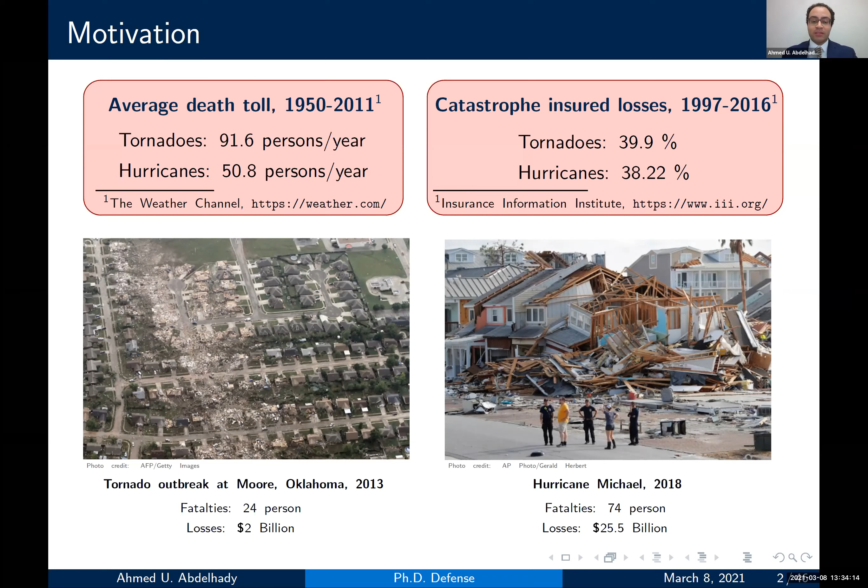The exposure component, which is where does this storm hit? For example, when hurricanes are moving over the Atlantic Ocean, no one gets hurt, so no disaster could happen. So there should be a living community exposed to the hurricane or tornado for a disaster to happen.

And finally, the resilience component, which is how resilient the exposed community is to this windstorm. If a tornado hits a very resilient community, no damage will occur, which means no disaster will happen. So as we can see, the level of resilience of the exposed community is an important factor as it will determine if a disaster will occur or not.

This brings us to an important question: are we confident about how resilient the exposed communities are? Is Miami ready for the next hurricane? Is Joplin prepared to take another tornado? In other words, how can we measure their resilience level to be more confident about their future?

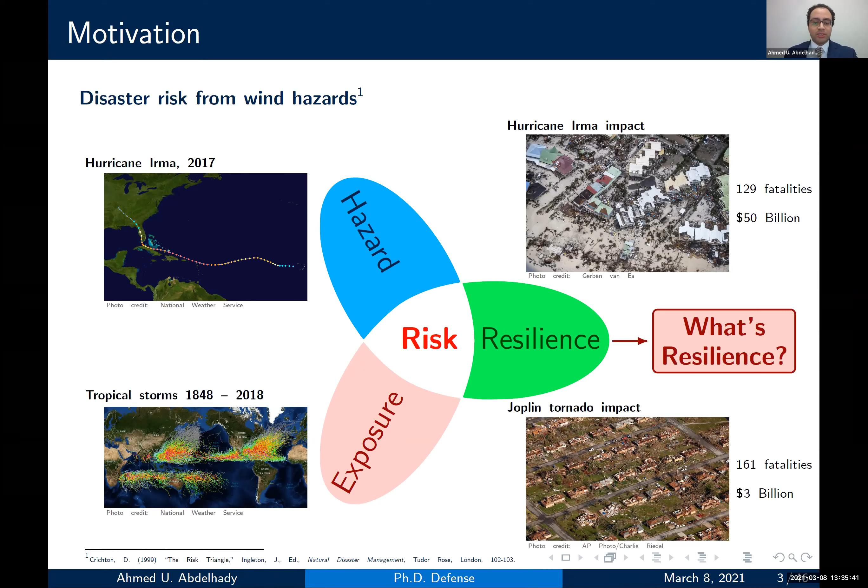To answer this question, we first need to define resilience, which is, according to the National Academy of Science, community resilience is the ability to prepare and plan for, absorb, recover from, and more successfully adapt to actual or potential adverse events.

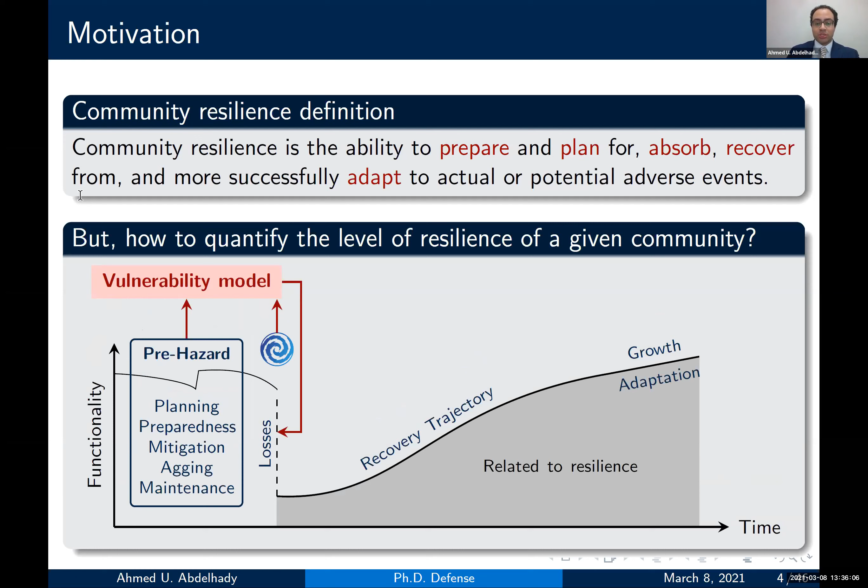To measure or quantify community resilience, we need a vulnerability model that uses the community's pre-hazard conditions and potential hazards as input to calculate the amount of immediate damage and losses, which will be used by a recovery model to estimate the community's recovery trajectory, and then the community resilience. So there are two required models to estimate community resilience: the vulnerability model and the recovery model.

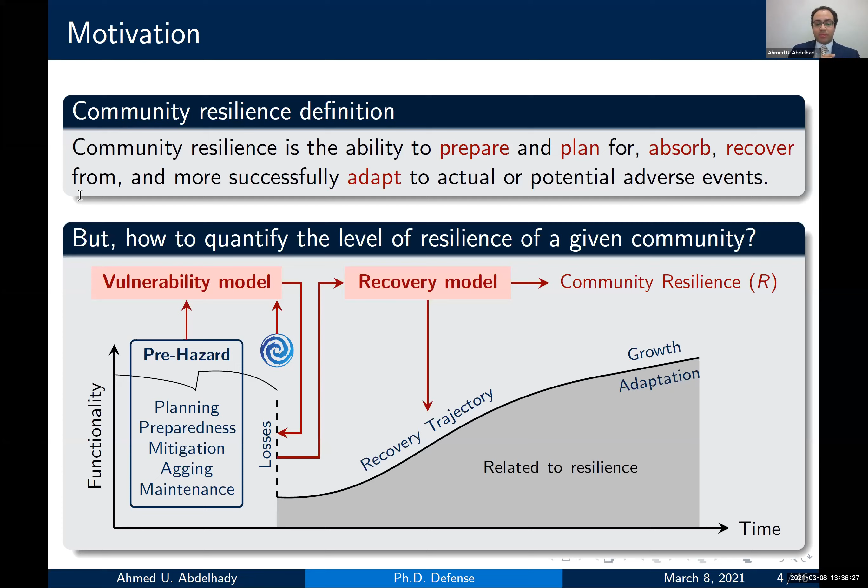This brings us to the outline of today's presentation. Today I will talk about the vulnerability and recovery modeling of residential communities subject to hurricane winds. Then I will present a framework to model the impact of hurricane rainfall. And finally, I will cover modeling of wind-borne debris in tornadoes, as wind-borne debris is one of the major sources of damage in tornadoes. So let's get started with the vulnerability of residential communities subject to hurricane winds.

What is the physics of the problem? We have a subdivision of residential buildings that is subject to a hurricane. Once the wind pressure on the building envelope exceeds its resistance, the building envelope components get damaged and potentially become airborne. The wind-borne components could potentially hit buildings on the downwind side and cause more damage. This breach in the building envelope will induce internal pressurization that could lead to more damage and more wind-borne debris.

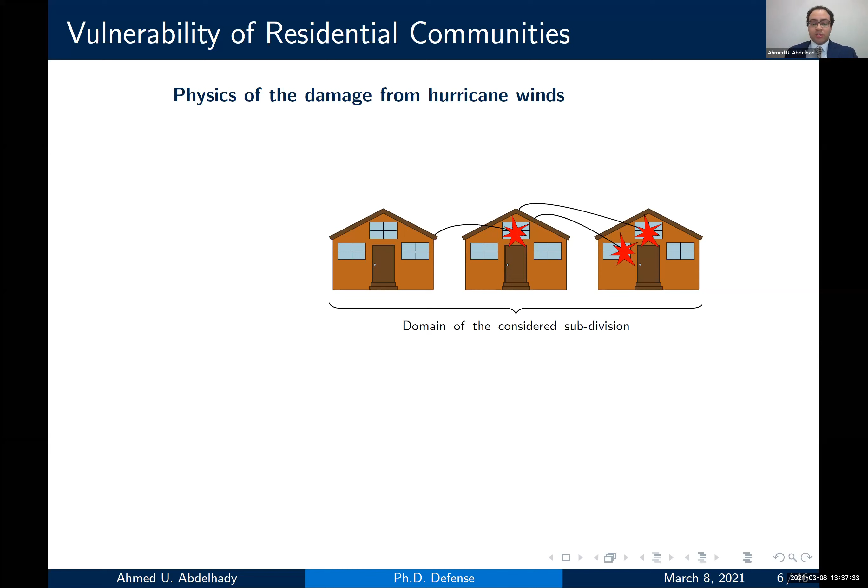So we have two damage mechanisms here: excessive wind pressure and the impact of wind-borne debris. The two mechanisms are progressive — the damage keeps progressing gradually as the hurricane approaches the community. They are interdependent and cascading: once the first damage occurs, more damage will occur, as in a domino effect.

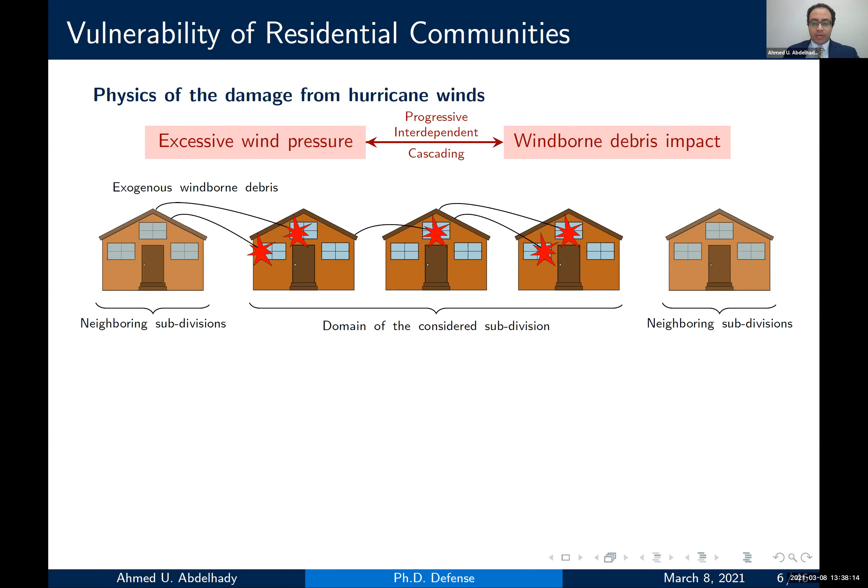Due to this cascading and interdependent nature of the damage, neighboring subdivisions can also have a destructive impact on our considered subdivision — what we will call here the effect of exogenous wind-borne debris. By taking a look at the literature, we find that the effect of exogenous wind-borne debris has not been studied yet.

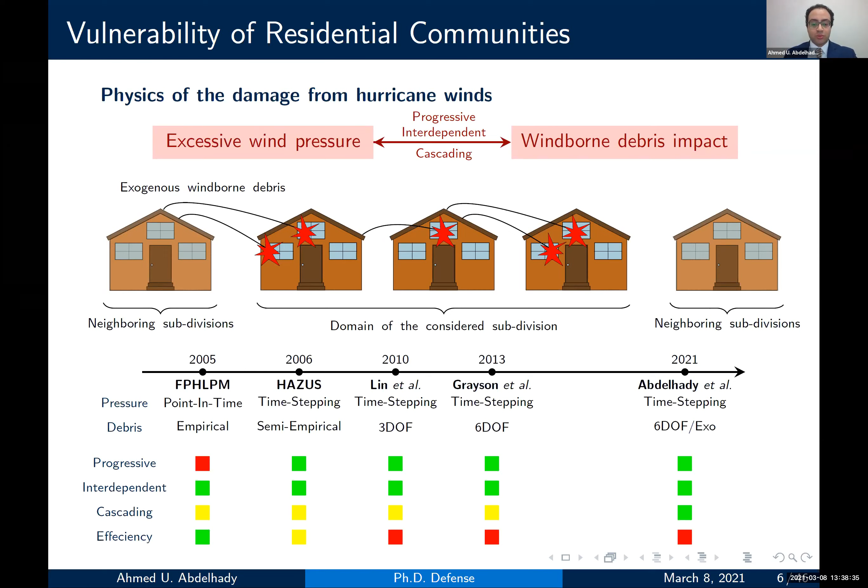So what I'll be presenting today is a time-stepping approach that models the full track of the hurricane while modeling the debris flight using a 6 degree of freedom trajectory model, and also accounting for the exogenous wind-borne debris. I'll start off with the exogenous wind-borne debris.

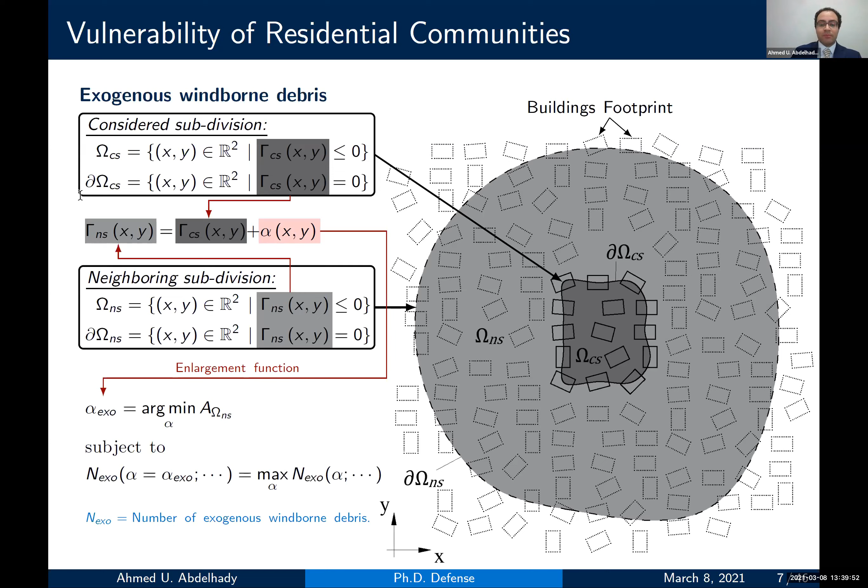The way I will handle this problem is by reformulating it for a single building case, and this will be helpful for two main reasons. The first is the boundary of the neighboring buildings can be assumed to be circular in the single building case, and circles are more manageable to deal with. The second is the single building case can be easily generalized to a neighborhood with any arbitrary boundary by simply taking the union of all buildings' required area.

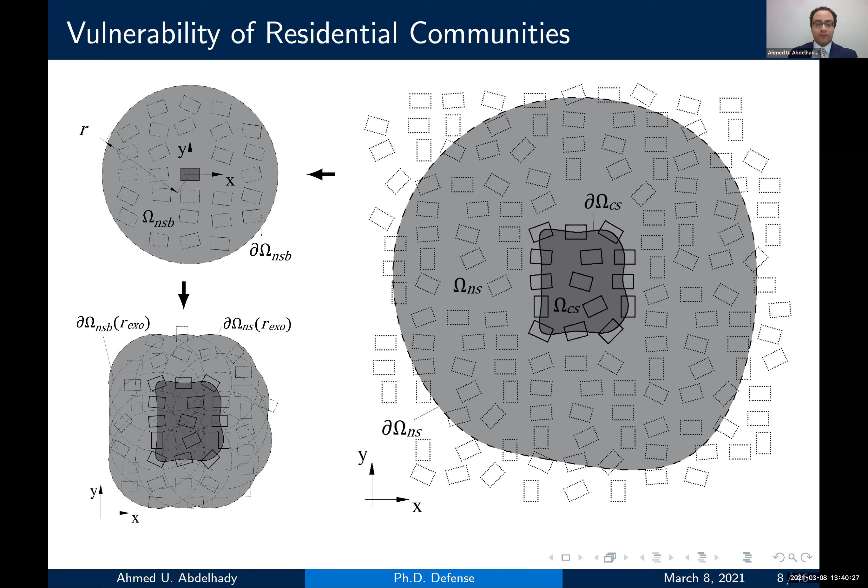This can be formalized as follows. We first need to find the omega for a single building case, then generalize the solution by taking the union of all omegas. By looking at the new optimization problem, we find that we need to estimate n exo, which is the number of exogenous wind-borne debris hitting the building.

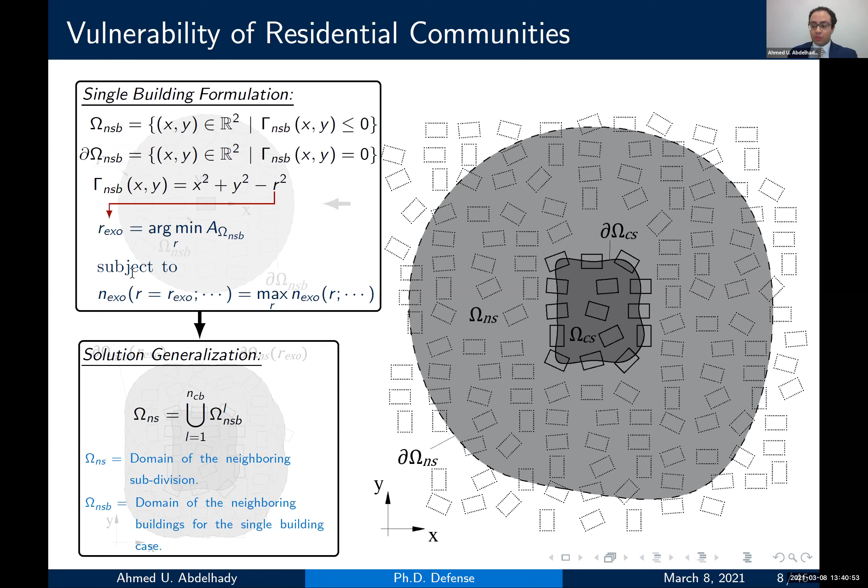The question here will be, how will we estimate this number? To answer this, we need to know the source of exogenous wind-borne debris, which is the damaged components of the neighboring buildings, and the driving force of the debris flight, which is the hurricane wind velocity. So we have neighborhood-related factors as well as hurricane-related factors, and all of them are associated with uncertainties — uncertainties in the building strength, uncertainties in the hurricane track, heading, pressure drop, wind speed, etc.

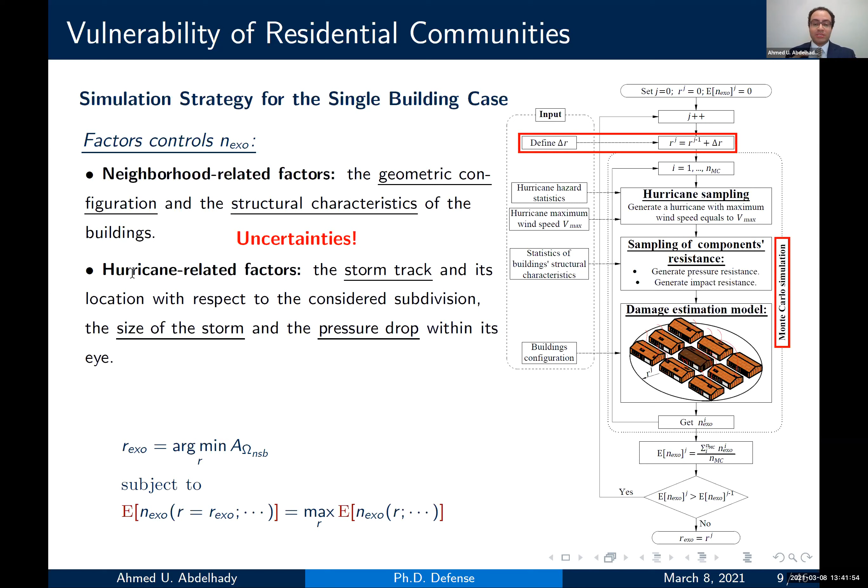These uncertainties will be handled using the Monte Carlo simulation method, and the problem statement will change to maximize the expected n exo. So in summary, the simulation strategy will increase the radius incrementally using a predefined delta R, then measure the number of exogenous wind-borne debris for each size step. Once the expected n exo maxes out, the r exo will equal this size step.

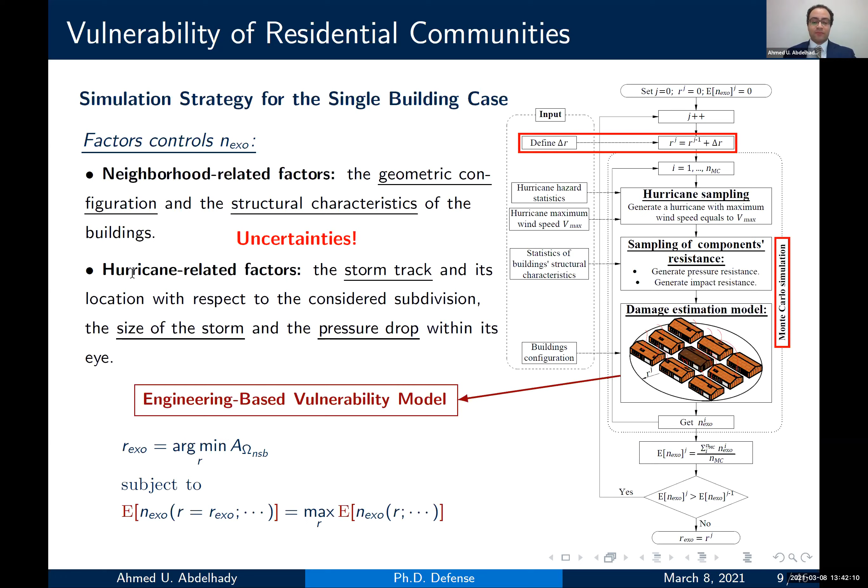And the damage estimation model used in this simulation is an engineering-based vulnerability model, which estimates building damage due to excessive dynamic wind pressure and debris impact.

Okay, let's take a quick look at some details on how exactly I calculate the wind pressure and debris loading. The debris linear and angular velocities used to estimate the debris impact energy are calculated using a three-dimensional 6 degree of freedom debris trajectory model.

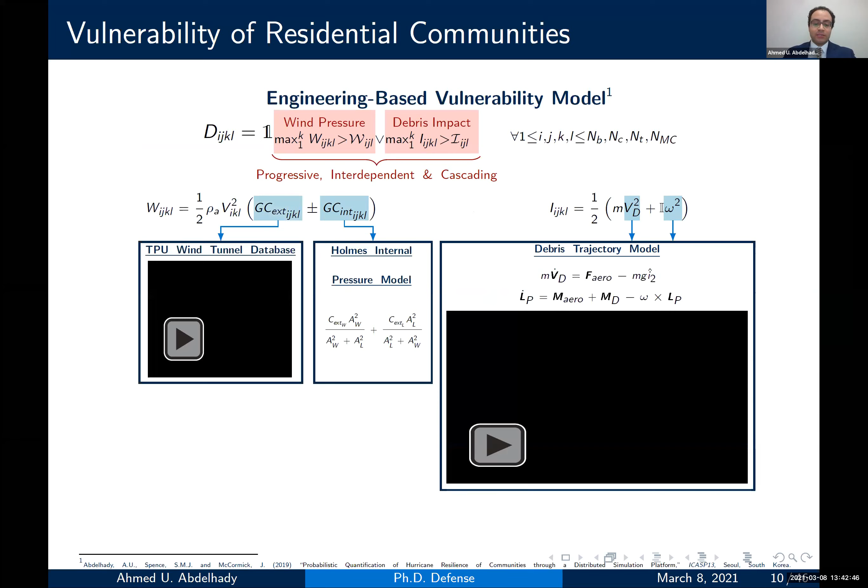As we can see here, wind-borne debris objects are in red and the houses are in blue. The internal pressure coefficients are estimated using Holmes' internal pressure model, and the external pressure coefficients are obtained from the wind tunnel database provided by Tokyo Polytechnic University.

Both damage mechanisms are a function of the hurricane wind field, which is estimated by adding the environmental scale component and the storm scale component vectorially. The environmental scale component is estimated based on the hurricane eye translational velocity, and the storm scale component is estimated by solving the momentum equation of the slab boundary layer.

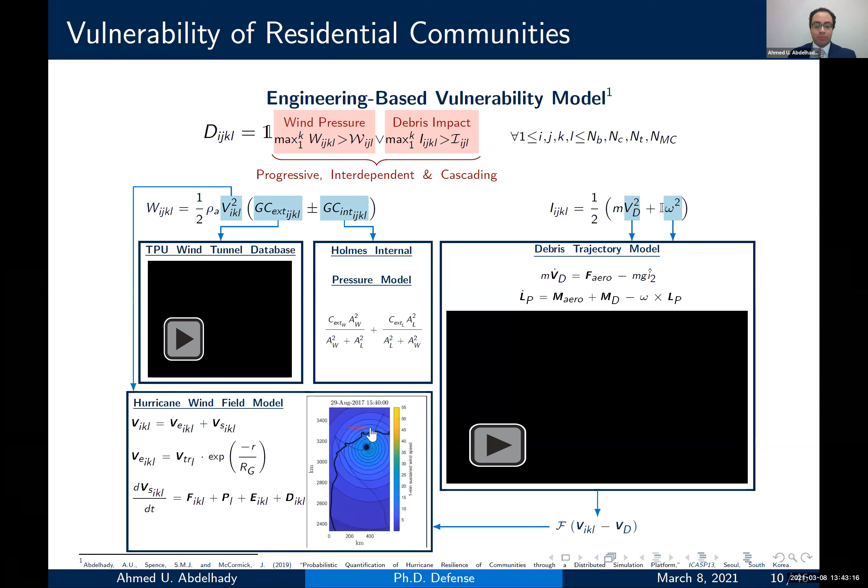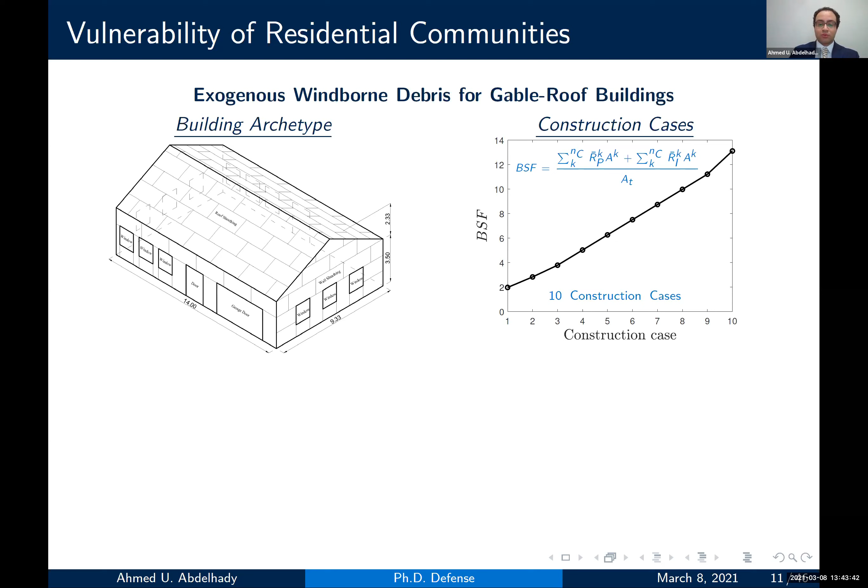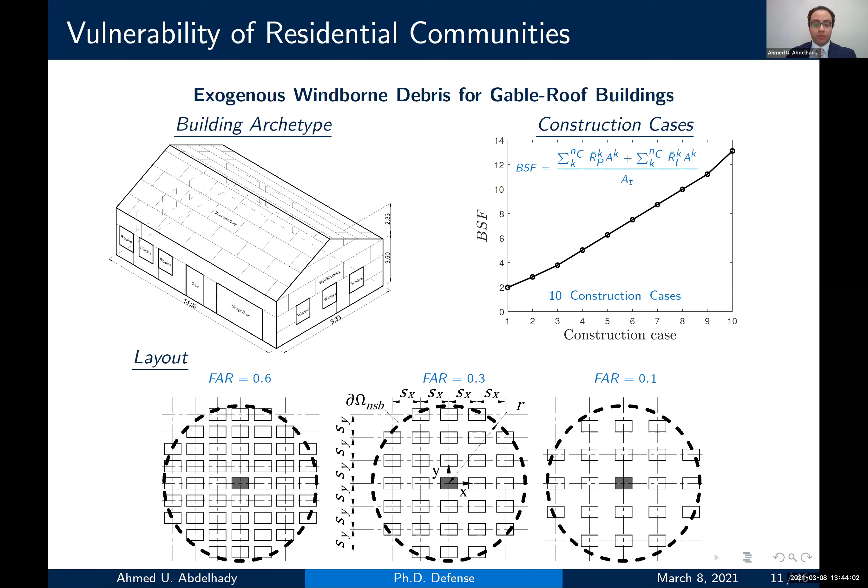In this study, we explored the effect of Vmax, which is the hurricane maximum wind speed, and the floor area ratio, and the building strength factor on the required r_exo. We need to note that all the RXO results reported in this study are normalized using Rmax, which is the maximum flight distance for the debris.

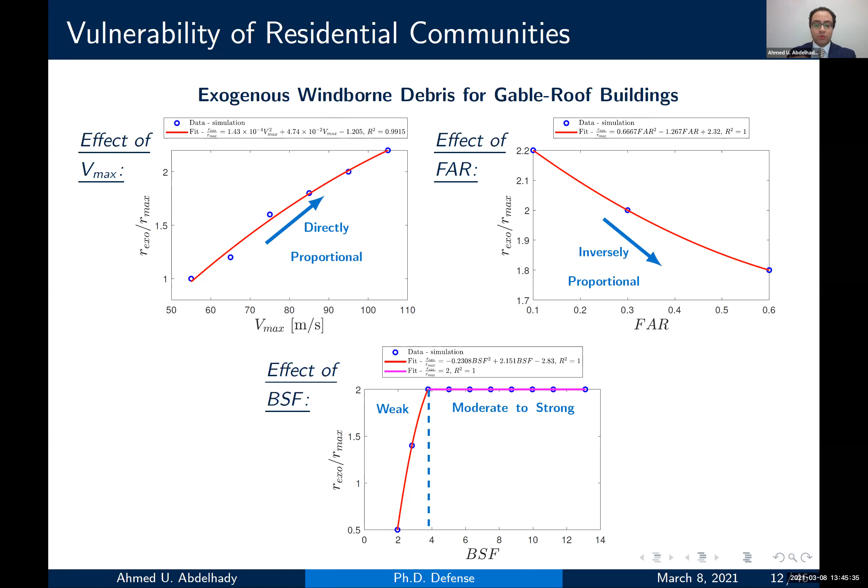The last figure shows that in general, building strength does not influence the required RXO, except for very weak construction cases, which require significantly smaller RXO compared to moderate and strong construction cases. The main reason is that weak construction cases tend to get damaged at very low wind speeds, and these low wind speeds are not sufficient to carry the dislodged components far enough to impact the considered building. As a result, the required RXO are lower here.

We concluded this study with a regression analysis to summarize all the results into a mathematical expression that can be used directly in the future without the need to rerun the simulations. Three main regions are used in this analysis.

We can observe that a big portion of the simulated domain shows a value of RXO that is actually bigger than Rmax itself, which emphasizes more on the cascading and interdependency nature of the damage from wind-borne debris.

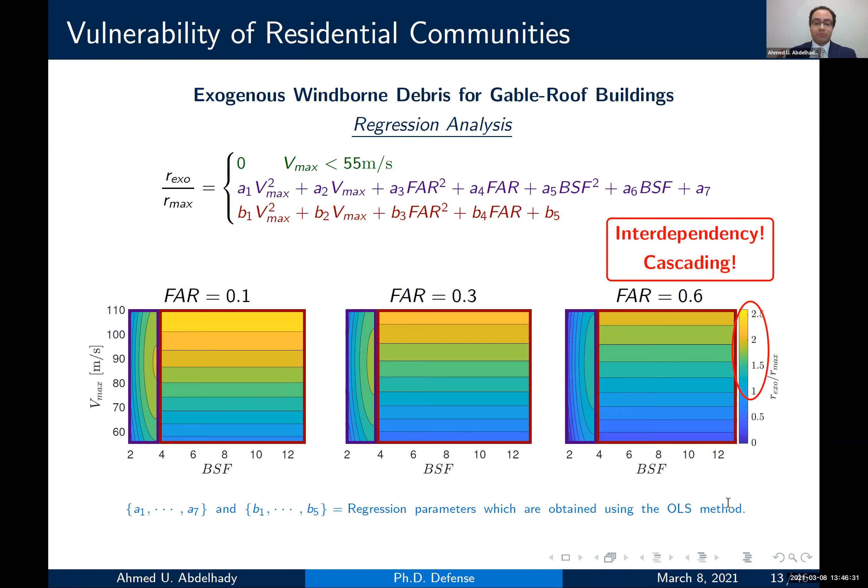So we concluded the first study, and we will move forward to the second one, which is risk and fragility assessment of residential wooden buildings under hurricane winds.

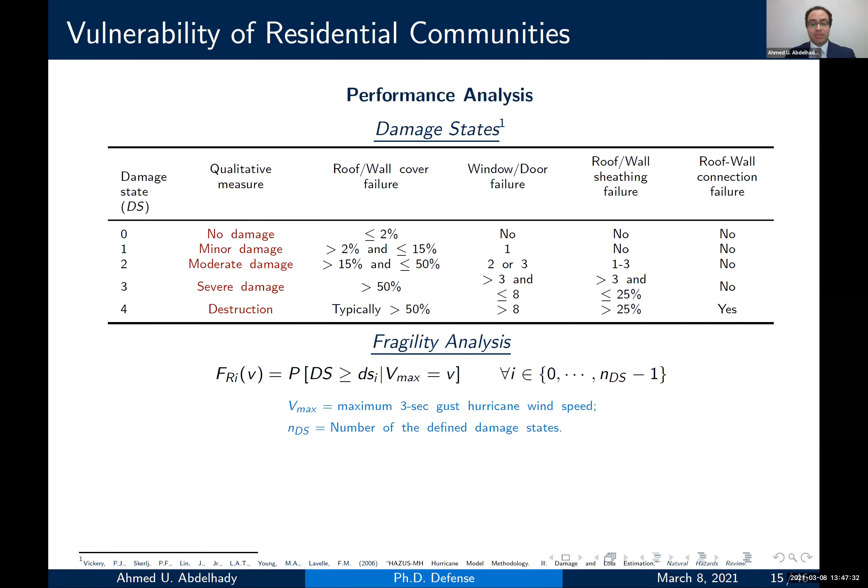To quantify the building performance probabilistically based on these damage states, fragility functions are required, which read as the probability of the building damage state exceeding a certain damage state given a specific hazard intensity, which is the maximum 3-second gust wind speed experienced by the building during the hurricane passage.

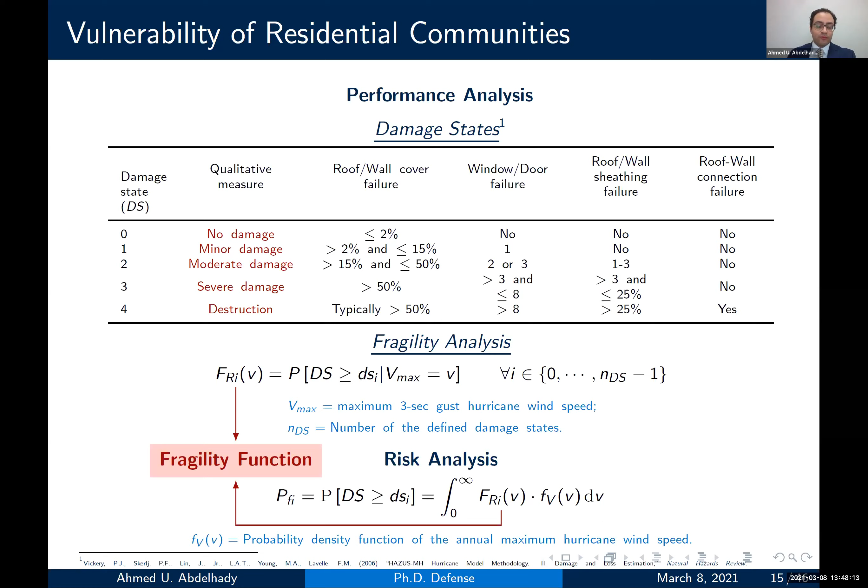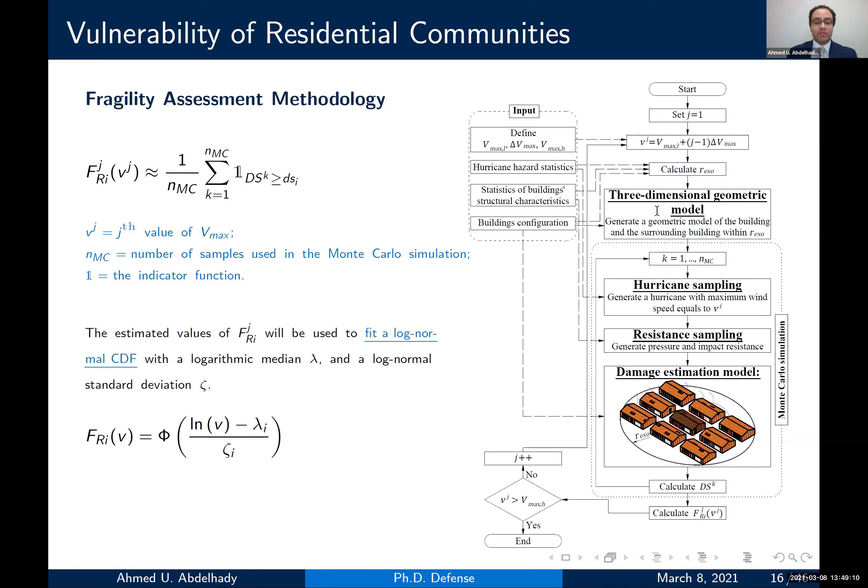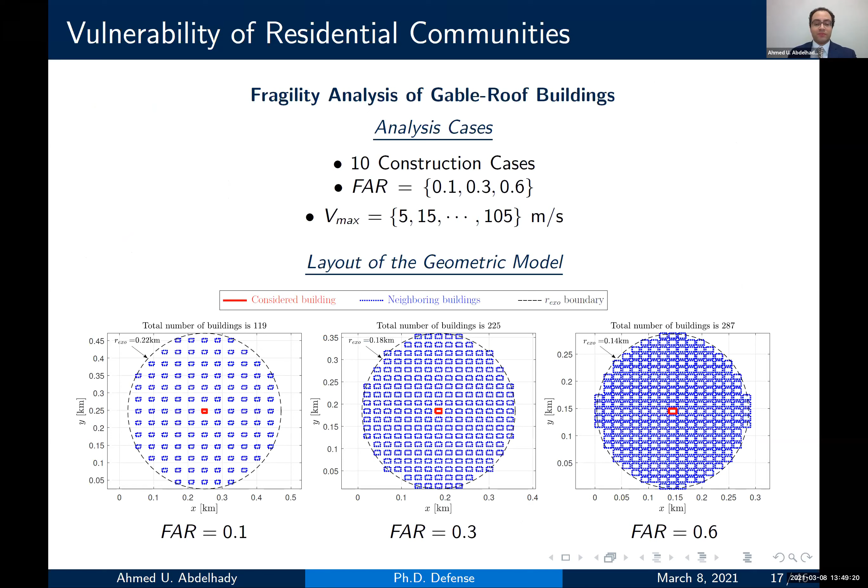Here, we applied this methodology to a gable roof archetype. Analysis cases are 10 construction cases, 3 floor area ratios, and 11 Vmax.

For the results of this study, I'll be more focused on showing the significance of including wind-borne debris damage on the estimated fragilities, as this is the main contribution here. Fragilities due to wind pressure damage have been around for a while, so I'll focus more on the effect of wind-borne debris.

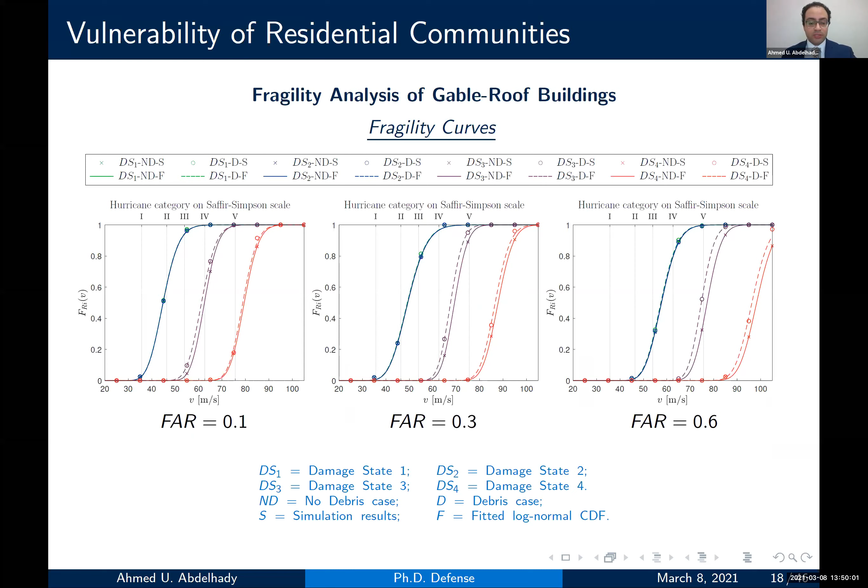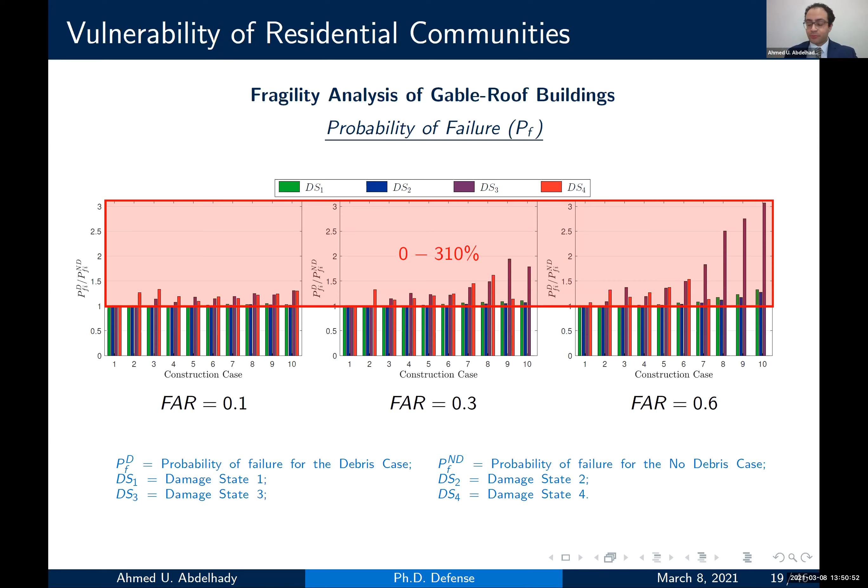Last one is we can clearly observe that the damage from wind-borne debris increases as the floor area ratio increases, which we also observed in the fragility curves. And this will conclude this study.

Now, we covered the vulnerability and the damage estimation part, and we will move on to the recovery and resilience part.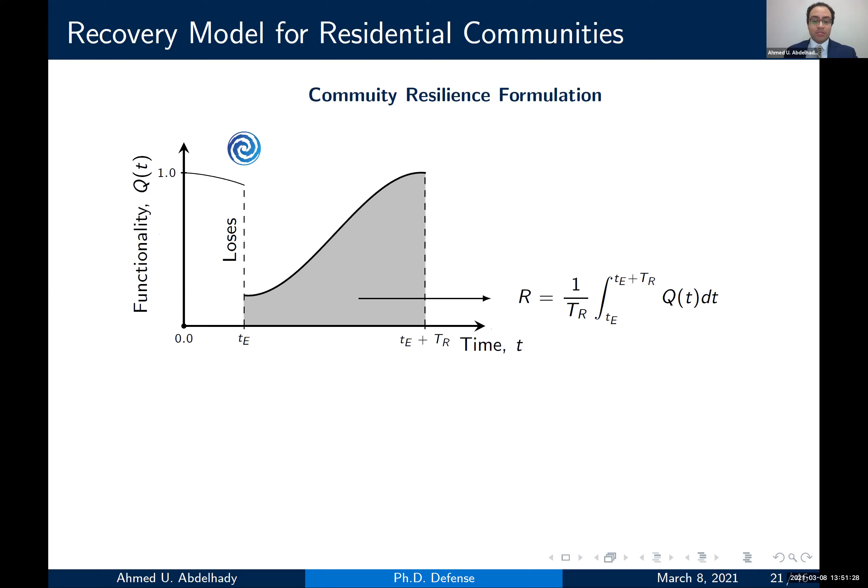Estimating the community recovery function hinges on the hazard intensity, the community vulnerability, as well as the recovery process, all of which are uncertain. And to account for these uncertainties, we need to quantify the community resilience probabilistically by estimating the cumulative distribution function of R.

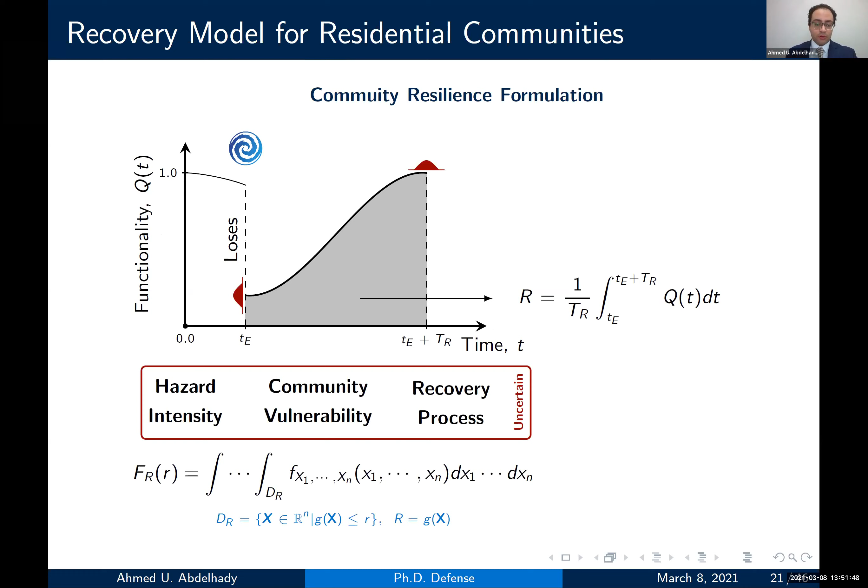We will find that deriving an analytical solution for this function is intractable, so a stochastic simulation approach is proposed here in this work, which is the basis of the presented framework.

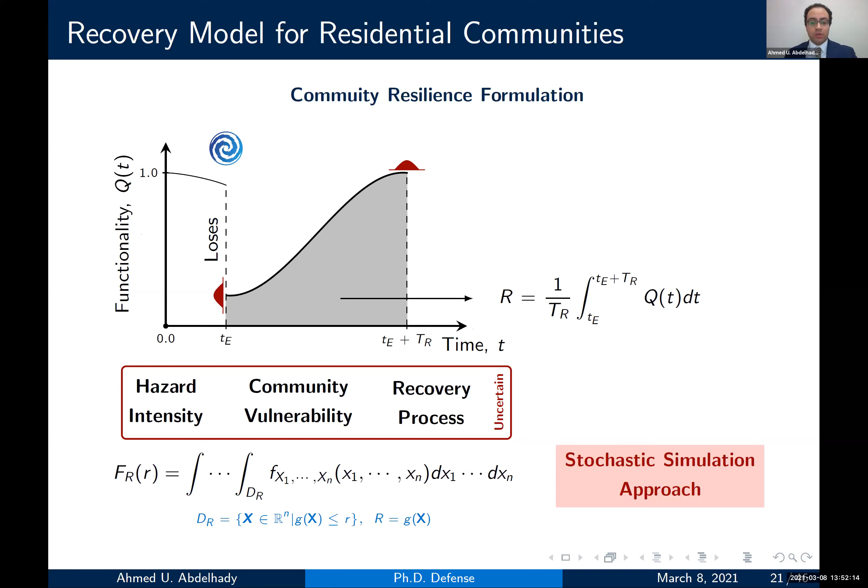So to wrap up, our goal is to quantify the community resilience measure R probabilistically by estimating its cumulative distribution function using a stochastic simulation approach. The stochastic simulation approach uses the Monte Carlo simulation algorithm for the estimation of the CDF of R.

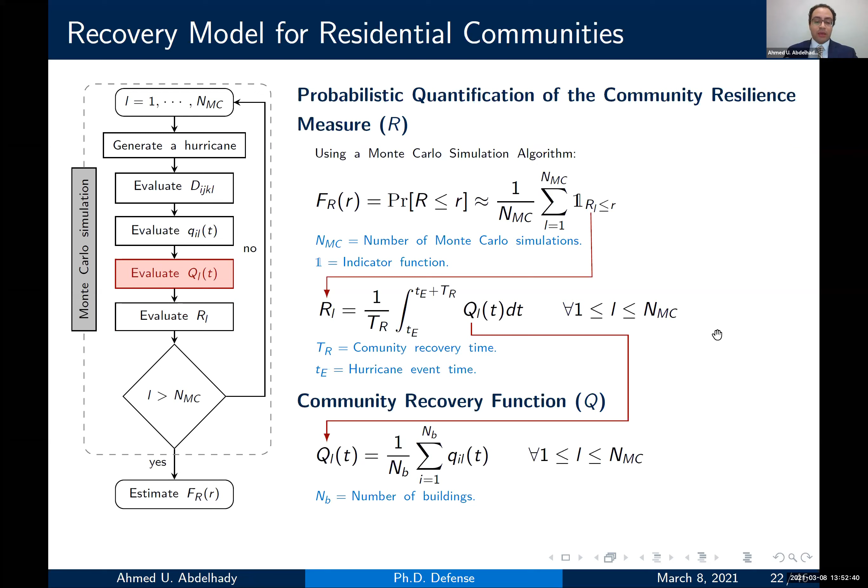We can find the flowchart of the proposed framework on the left side of the slide here. And for each realization, R is estimated using the community resilience measure integral. And the community recovery Q is estimated by aggregating building recovery functions.

The building recovery function is estimated using a new building recovery model, which is based on three functionality states: not safe in red, safe with some services off in yellow, and safe with full services in green. By services here, I mean things like electricity, water, internet, gas, etc.

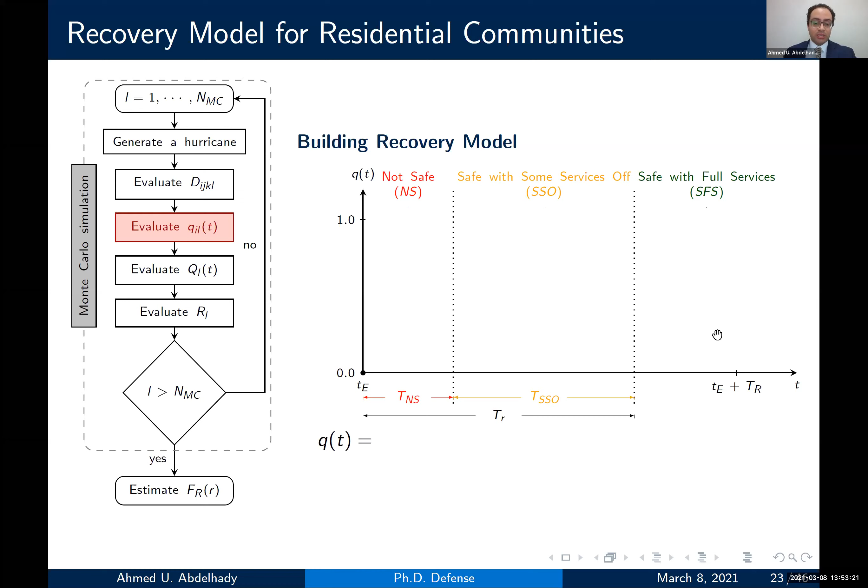Okay, we know that the work progress for the recovery activities typically advances continuously over time, while the functionality state changes only at the completion of a group of activities. For this reason, the level of functionality associated with the functionality states is modeled using the Heaviside step function, and it is either 0 or 1.

0 means residents evacuate or didn't return back to the building after the hurricane event, while 1 means they returned back or didn't evacuate in the first place. In particular, the level of functionality, as we can see here in the graph, of the NS state is 0 and the SFS state is 1.

And for the SSO state, the one in yellow here, it is either 1 or 0, since the building is safe to occupy, but there are some services off. In this functionality state, the residents may choose to return back to their residence or not.

A decision like that hinges on the level of damage of the building itself and its surrounding buildings and the socioeconomic status of the residents. In this building recovery model, this is considered using the probability of functionality loss given the SSO functionality state. Okay, so this is the idea of the building recovery model.

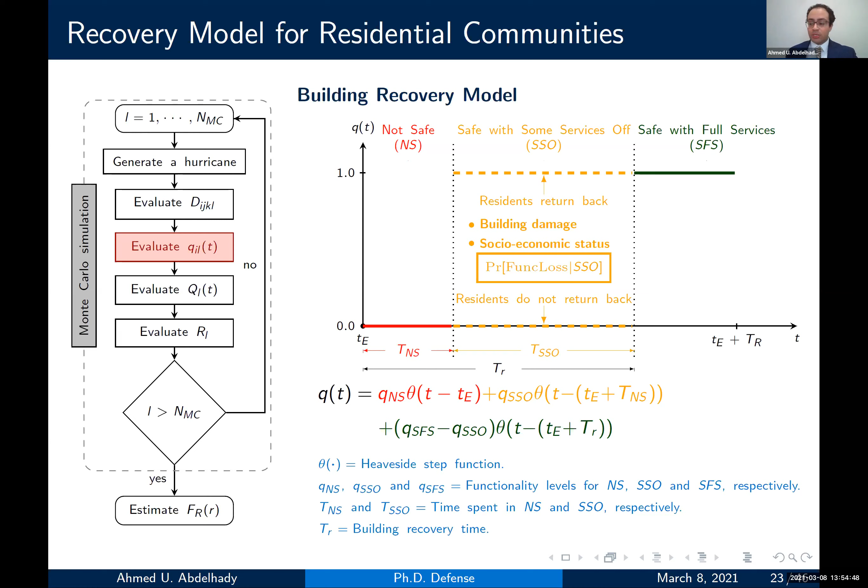Now the question is, how will this conceptual idea be able to model the recovery of each building in the community? The answer is using newly defined resilience limit states that are introduced here in the building recovery model, to translate the damage sustained by each building to a corresponding recovery function.

In particular, 5 resilience limit states are defined here, named as minimal damage, minor occupiable damage, moderate unoccupiable damage, severe irreparable damage, and complete collapse. Each one of these resilience limit states has a unique combination of the following recovery activities: inspection, evaluation and planning, repair activities, and demolition and replacement.

Okay, so to conclude, there is building damage and the building recovery functions that consist of 3 functionality states. What exactly is the recovery path of the building? This will be specified by the resilience limit state this building is in.

Keeping in mind that these resilience limit states do not just deal with each building as a separate entity from the surrounding community, they actually factor the condition of the building surroundings in the recovery path calculation, and this is described in more detail in this paper. Finally, the damage sustained by each building is estimated using the engineering-based vulnerability models that we mentioned earlier.

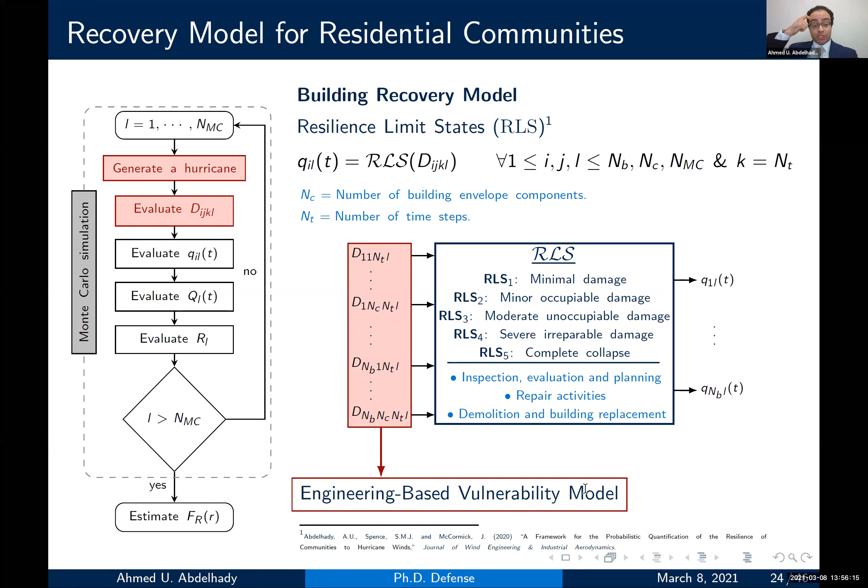Now let's go to the application part. This framework is applied to a residential neighborhood in Miami, Florida, to quantify its resilience to hurricanes probabilistically.

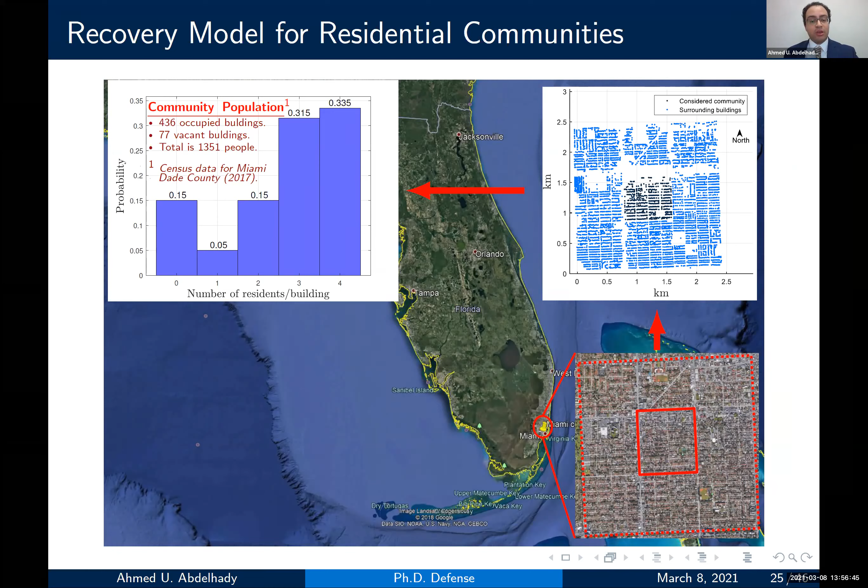The neighborhood consists of 513 buildings. Surrounding buildings are also modeled to account for the exogenous windborne debris. The community population is modeled using available census data about Miami-Dade County. In particular, the number of residents per building follows this probability mass function.

Hurricane generation is controlled by the single-site probabilistic hurricane hazard model, which subjects the neighborhood to 15,000 hurricanes with a category that follows this distribution.

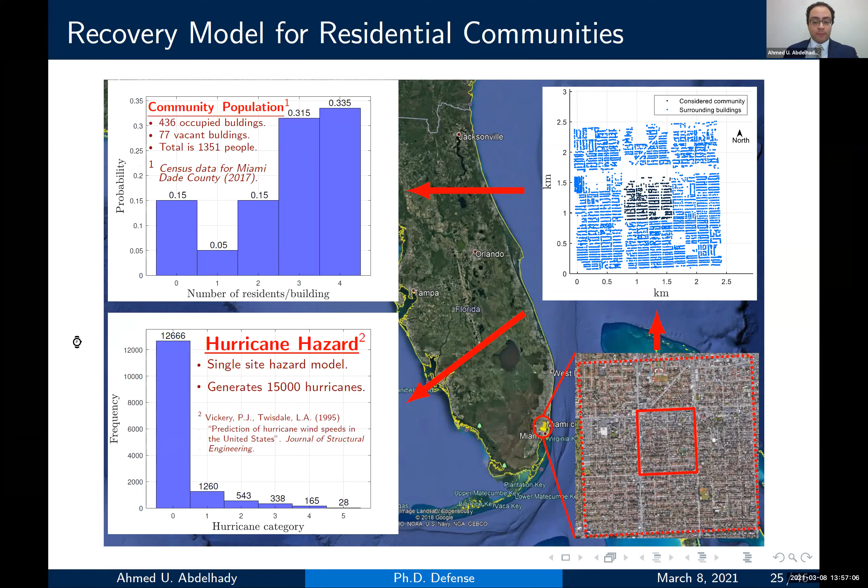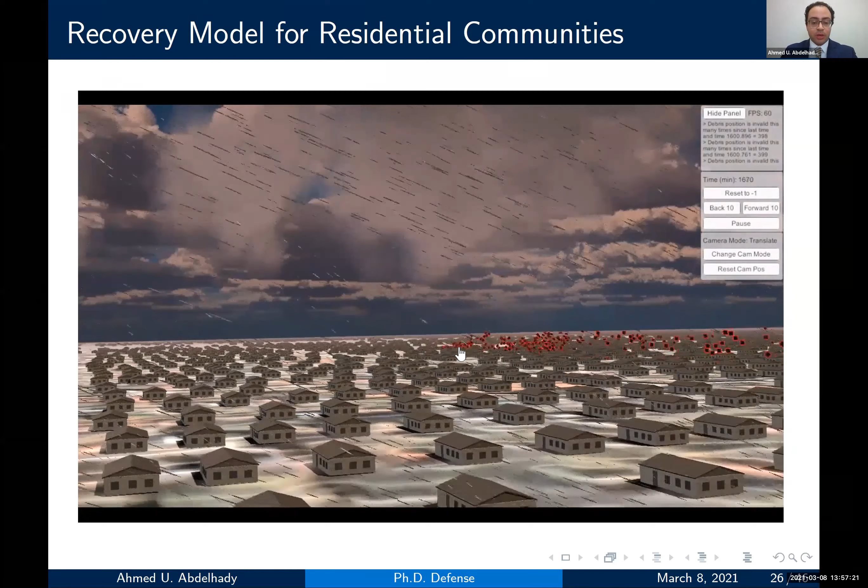In this video, we will see some part of the simulations. A single family, gable roof archetype is used to model the buildings. We can see the windborne debris here highlighted in red, flying in the hurricane's wind field, impacting other buildings and causing more damage.

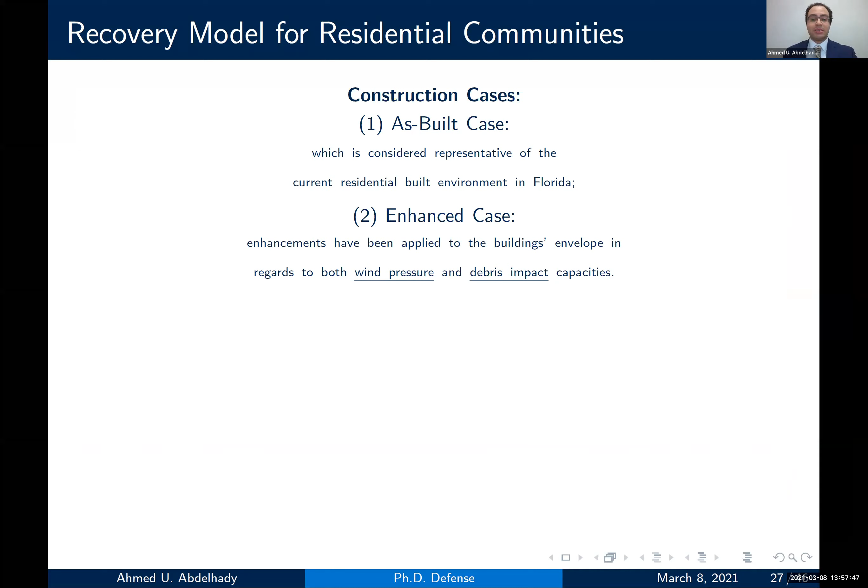To show the capabilities of the framework in differentiating various construction cases and the mitigation strategies, two construction cases are considered: the as-built case and the enhanced case, which applies enhancement to the wind pressure and debris impact capacities as a suggested mitigation plan.

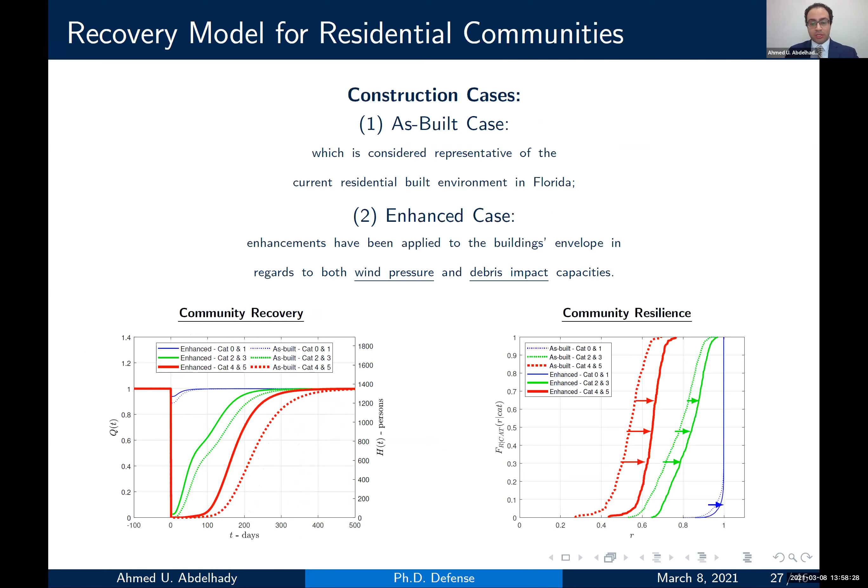Okay, we talked about the vulnerability and recovery modeling for hurricane winds. Let's move on to the impact of hurricane rainfall.

Hurricanes typically produce severe and widespread rainfall, and this rainfall causes significant damage to the built environment and its supporting infrastructure. In particular, the damage caused by rainfall to the buildings happens progressively over two stages.

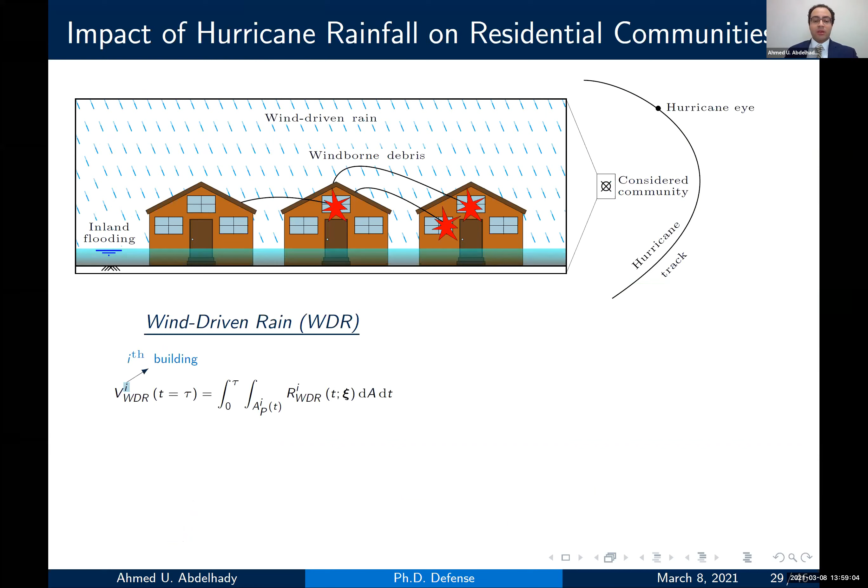In the first stage, rainwater seeps into the building under the influence of the wind, what we call wind-driven rain, through the perforations in the building envelope, leading to potential damage in the internal content, and in some extreme cases, it can damage the structural system itself.

The second stage happens when the rainfall persists over a longer period of time. This could saturate the ground and overwhelm the surrounding drainage system, leading to inland flood.

So, a fundamental step here to accurately estimate the damage caused by hurricane rainfall to residential communities is to quantify the amount of water ingress occurring during both stages, wind-driven rain and inland flood.

Let's take a look here at this integral on the left side. What we basically need to estimate the amount of water ingress due to wind-driven rain is the wind-driven rain intensity over the building envelope and the perforation area in the building envelope.

The perforation areas or the damaged areas can be calculated using an engineering-based vulnerability model. Either these perforations are caused by a hit from wind-borne debris or by the wind pressure. Both are considered in this model.

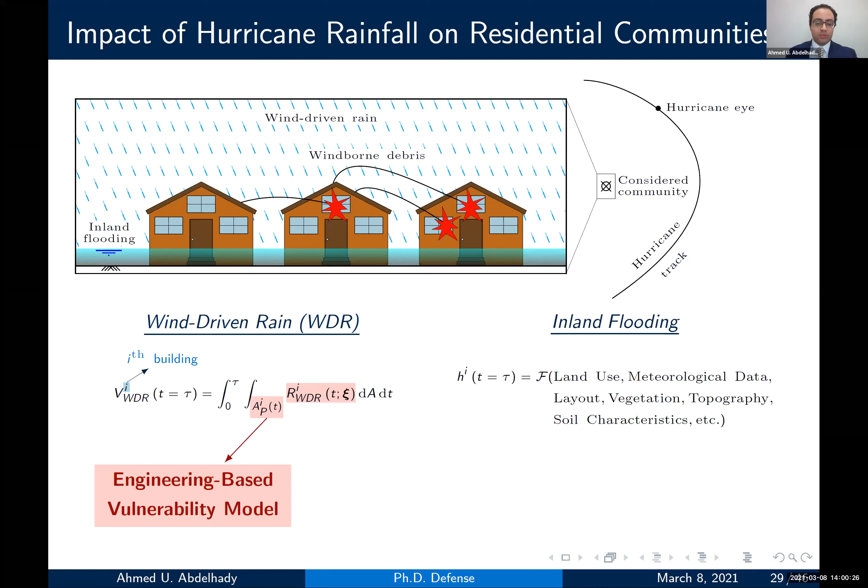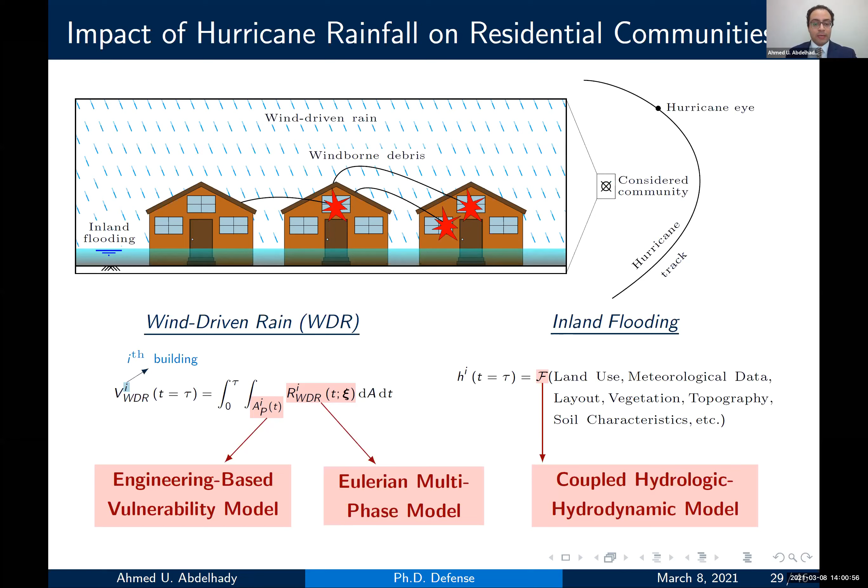For the wind-driven rain intensity, we will estimate that using an Eulerian multiphase model, which I will describe in more detail shortly. The estimate of water ingress due to the inland flooding stage requires the estimation of the flood inundation depth at each building. To do so, we need a coupled hydrologic-hydrodynamic model, which I will also provide more details on shortly. So let's start with the wind-driven rain intensity.

Two main steps are required here. In the first step, the time averaged wind speed is estimated around the buildings by solving the Reynolds averaged Navier-Stokes equation with the realizable K epsilon turbulence model. In the second stage, the Eulerian multiphase model uses the simulated wind speed to model the wind-driven rain field.

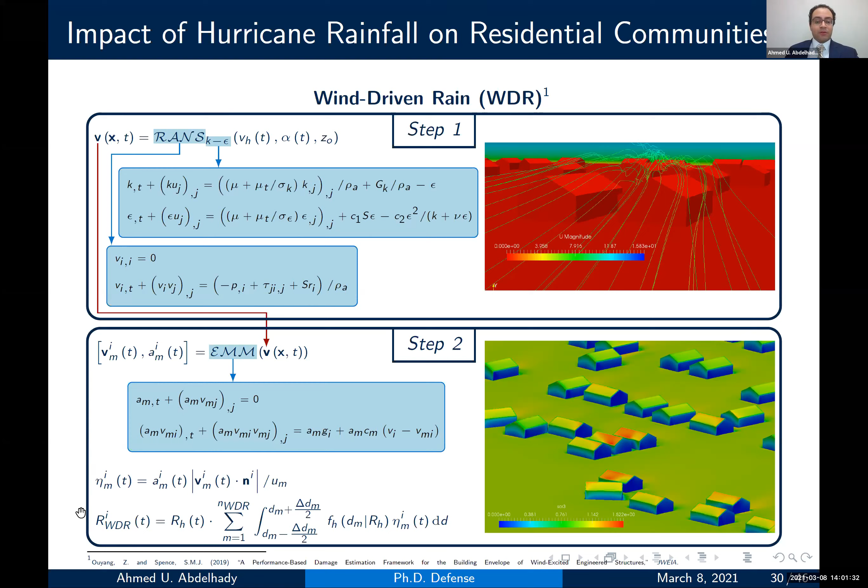For the inland flooding, the TRIBS model uses the community layout, land use, topography, vegetation, soil characteristics, and the meteorological data like temperature, humidity, radiation, horizontal rainfall, etc., to model the relevant hydrologic processes such as evapotranspiration, infiltration, rainfall interception, etc. The output is the temporal variation of the surface runoff, referred to as capital R here.

This surface runoff is then used by the OFM model to propagate the surface runoff in the residential communities using the shallow water equations. More details about this coupled hydrodynamic model can be found in this paper by Kim et al., and the model itself is provided by Dr. Jongho Kim and Professor Valeriy Ivanov.

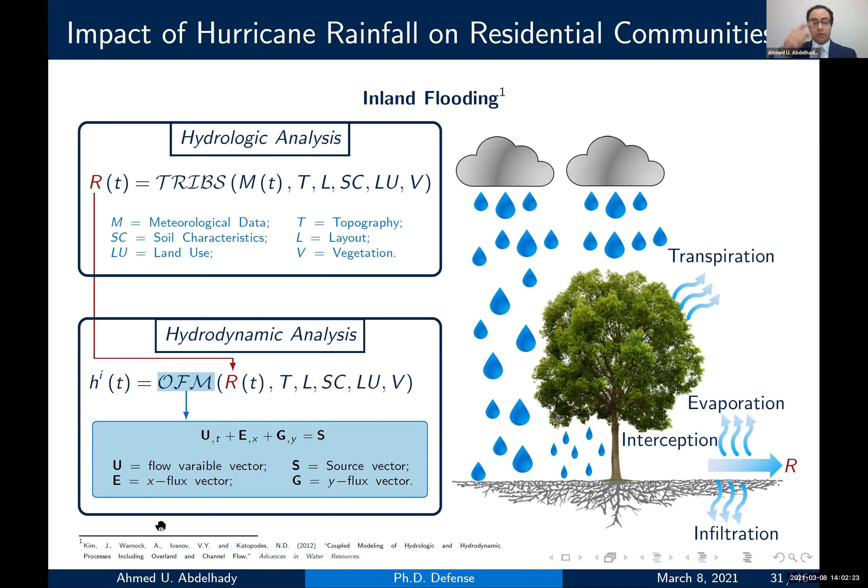This framework is applied to Houston, Texas to simulate Hurricane Harvey rainfall. On the right-hand side here, we can find the full track of Harvey, and on the left-hand side, we will find the simulated part of the track, as at the very beginning and the very end, Houston was not affected by Harvey.

A neighborhood that consists of 580 buildings is modeled, and three construction cases are considered, which are named as weak, moderate, and strong construction cases.

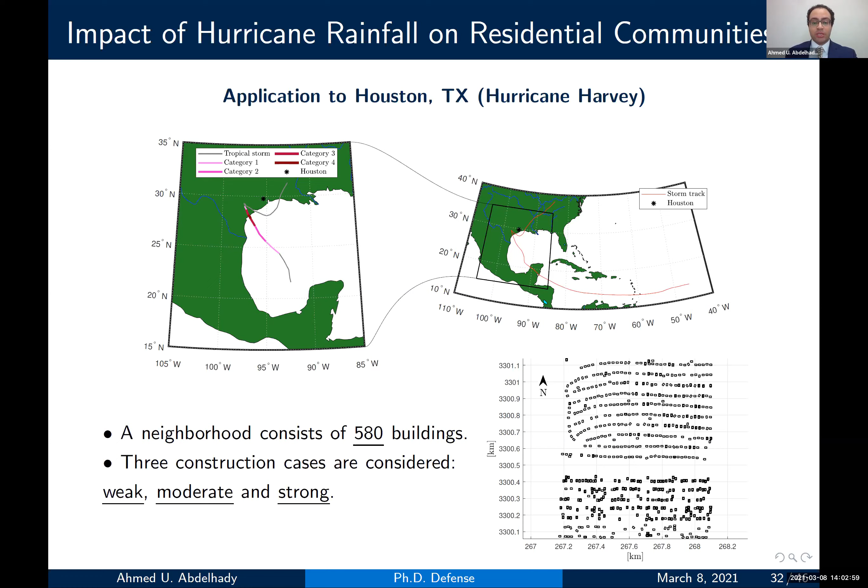Here is the simulated Harvey on the right-hand side of the slide, and on the left part is the simulated wind speed versus the data obtained from NOAA. Harvey impacted Houston as a tropical storm, so the wind speeds are amplified such that it impacted Houston as category 2 and 3 hurricanes, just to study more what-if scenarios, as this will help us understand the role of each of the wind-driven rain.

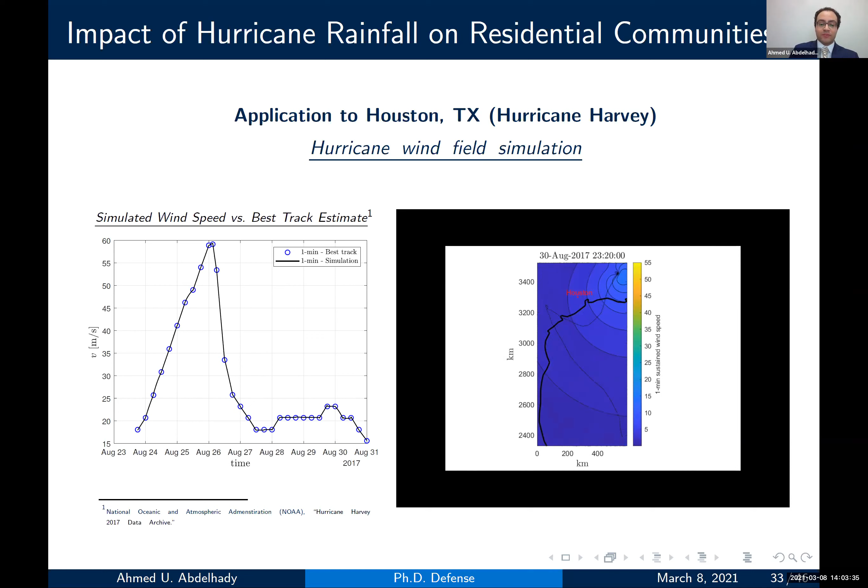And the inland flooding. I will conclude the results of this study with this figure. This black line represents the average flooding depth at all buildings in the considered community, and the green one represents the average water depth inside buildings due to wind-driven rain for the original Harvey winds, which was a tropical storm. The yellow lines are when Harvey is amplified to a category 2, and the red lines are when it is amplified to a category 3.

We can see here as the hurricane intensity increases, the water ingress from wind-driven rain becomes more significant. It can even exceed the flooding in some cases. This shows the importance of considering both wind-driven rain and inland flooding while planning to mitigate the consequences of hurricane rainfall, as both require really diverse mitigation actions.

For example, while mitigation measures like dams, levees, flood walls, etc., can be efficient in mitigating the damage from flooding, these measures do not mitigate damage from wind-driven rain. So accounting for both is really important to provide a more comprehensive picture of what could happen.

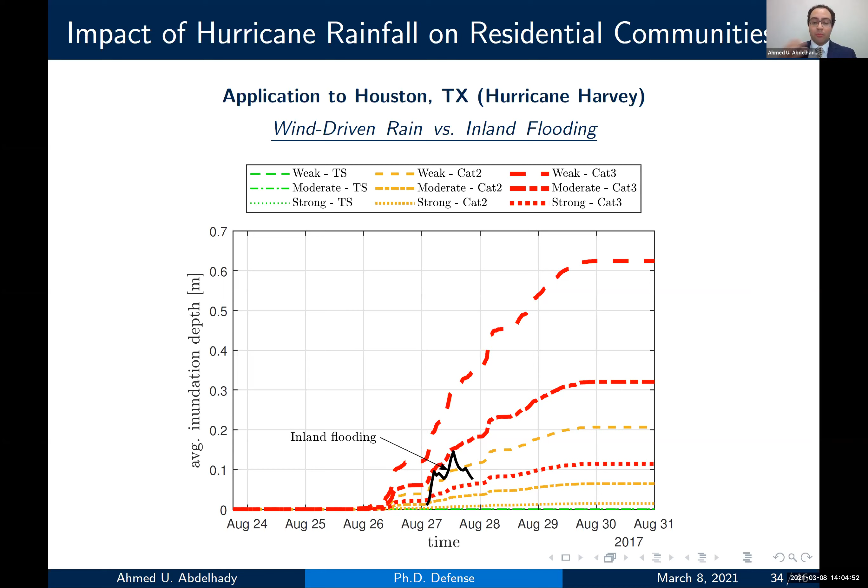And this concludes the hurricane rainfall part. And now I will move on to modeling

Wind-borne debris. Excuse me, I just take a sip of water.

And now I'll move on to modeling wind-borne debris in tornadoes. How can we quantify damage from wind-borne debris? Four main components need to be identified.

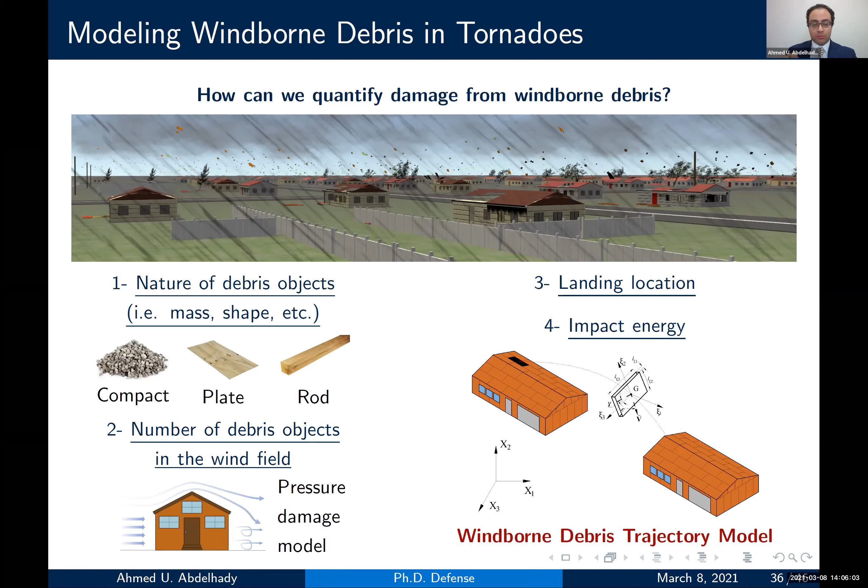Nature of debris objects: based on damage surveys, the damage components of buildings constitute the majority of the debris objects in the windstorm, and they can be categorized based on their shape as compact objects, plate-like objects, and rod-like objects. Number two is the number of debris objects in the wind field, which can be initially determined using a pressure damage model. Number three and four are the debris landing location and its impact energy upon landing, which requires a debris trajectory model. This trajectory model is what I'll be presenting in this section.

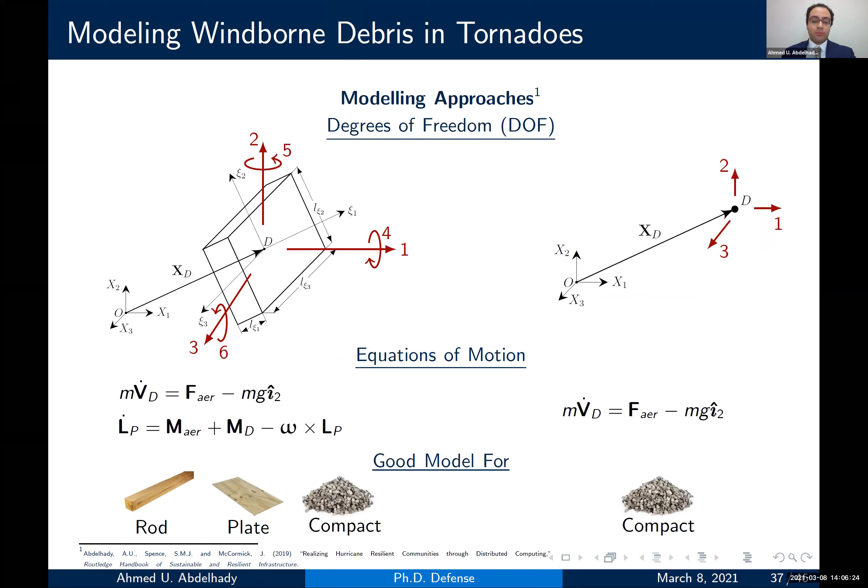I'll start off with the modeling approaches. We have 6 degree of freedom models and 3 degree of freedom models. The 6 degree of freedom model is actually good to estimate the trajectory of all shapes of debris, while the 3 degree of freedom model is considered a good approximation for the compact debris only.

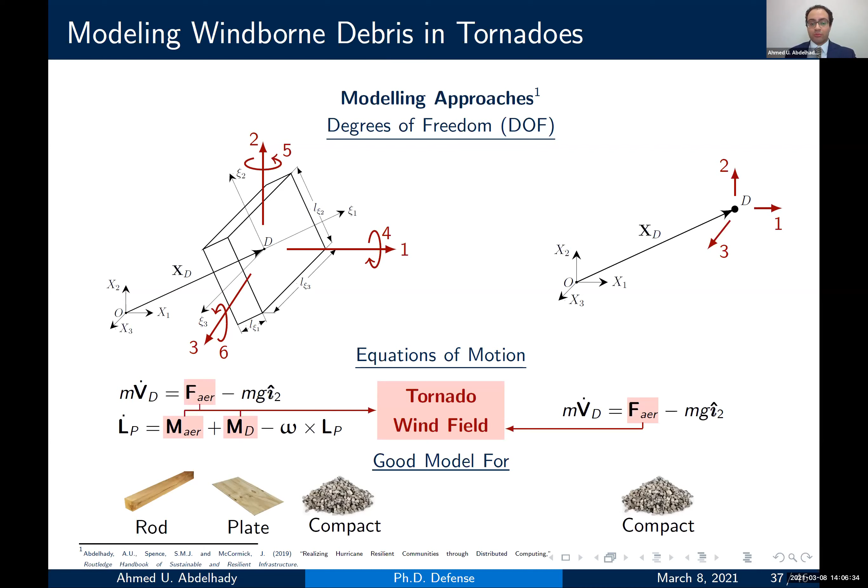Both of them require a tornado wind field model to calculate the aerodynamic forces and moments. The tornado wind field model simplifies the tornado wind field velocities into 4 main components: translational, radial, circumferential, and vertical velocities. Okay, let's take a quick look at previous research work here.

We will find that previous research work in tornadoes was mainly based on the 3 degree of freedom trajectory model. What I'll be doing here is develop a solution strategy for the 6 degree of freedom model in a tornado wind field.

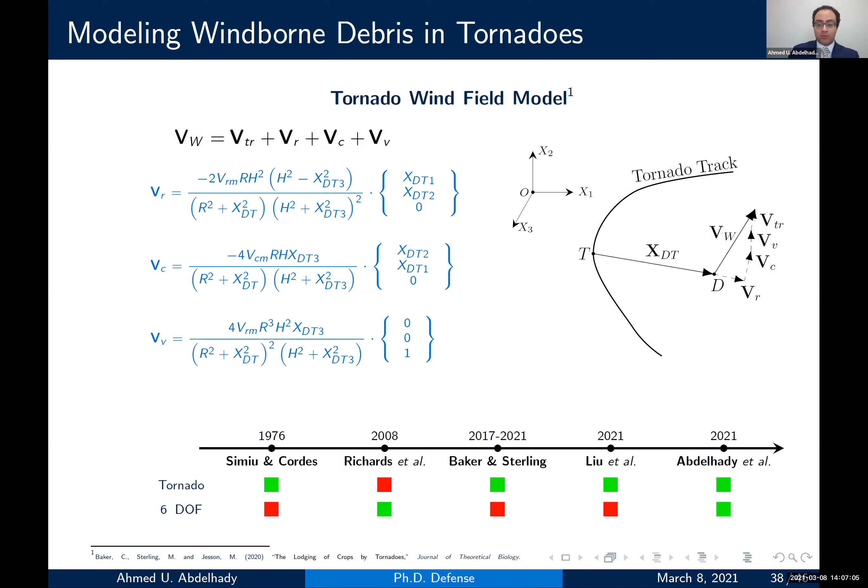The solution strategy uses the debris initial conditions, tornado parameters, and wind tunnel data as input to solve the equation of motion using a predictor-corrector time marching scheme, which continues to update the parameters defining the wind-borne debris trajectory for each time step until the debris object falls on the ground.

A very high-level illustration of the predictor-corrector scheme: the predictor time marching step starts from the current value of the parameter of interest, then calculates an initial guess for the next time step via the Euler method. The corrector time marching step improves this initial guess using the trapezoidal rule to obtain the value at the next time step.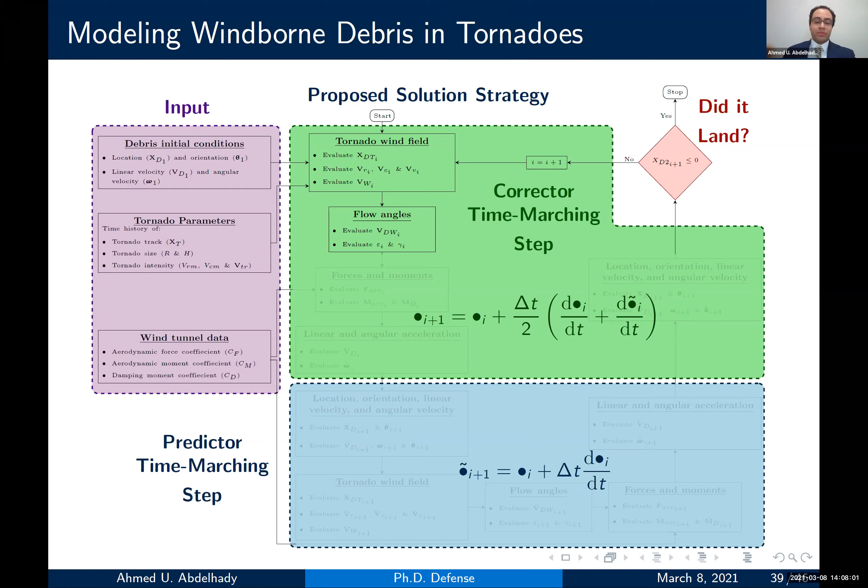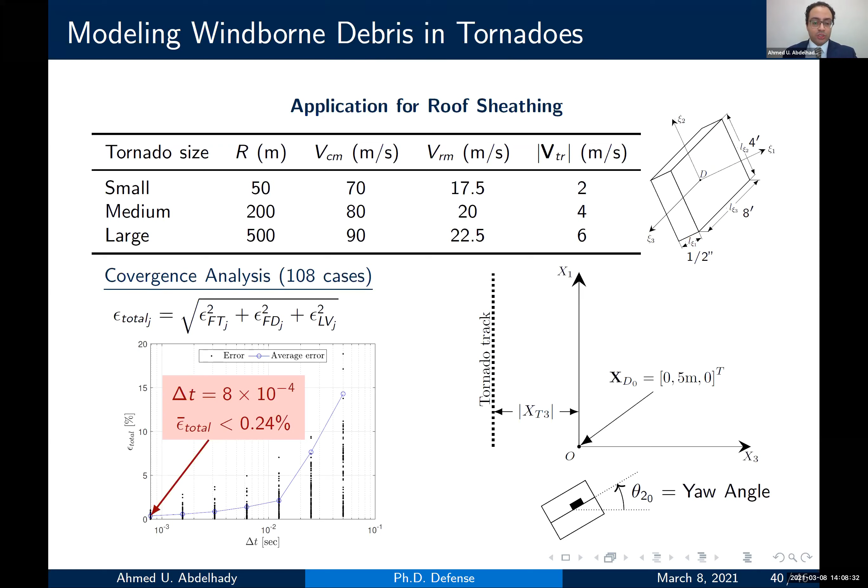So I will conclude this study with 2 videos.

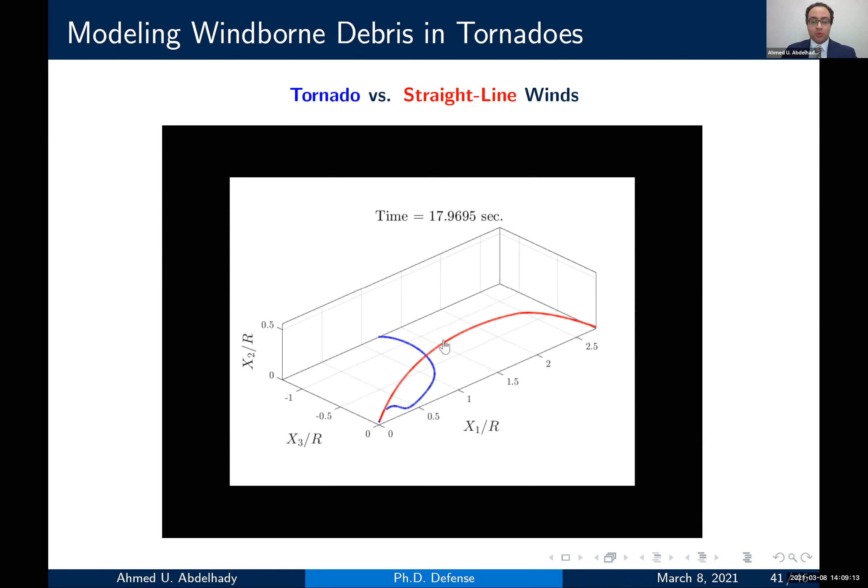The first one is to show the difference between straight line wind field and tornado wind field. The trajectory of the straight winds is in red, and the one in blue is for the tornado. As we can see in this video, the straight line wind produces a very different trajectory than what the tornado will produce, which emphasizes the need for this kind of model for tornado debris. Straight line wind approximation is actually not accurate enough to capture this curvature that happens in tornadoes.

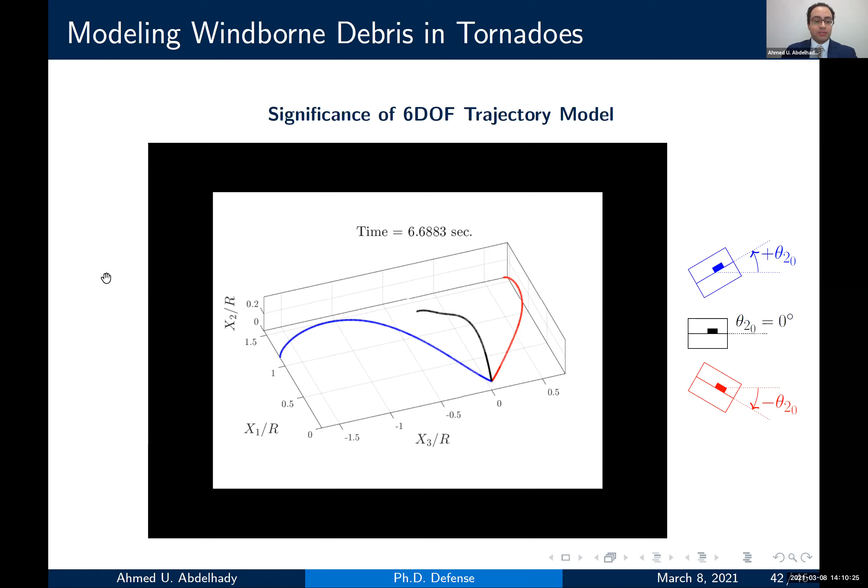Why does this show the importance of the 6 degree of freedom model? Because the 3 degree of freedom model does not have theta2 as an input parameter, so it will not feel these variations, and all of them will have the same trajectory. While as we can see in this video, each one of them has a very distinct trajectory. This concludes the tornado debris study.

Before closing, I would like to highlight the key contributions. An engineering-based hurricane vulnerability model is developed here that can account for exogenous wind-borne debris, and is also used to develop fragility functions for the combined action of wind pressure and debris impact. Community resilience is also quantified probabilistically, and to do so, a new building level recovery model is introduced, as well as resilience limit states.

Modeling hurricane rainfall is carried out comprehensively by accounting for both wind-driven rain and inland flooding. And finally, a wind-borne debris trajectory model for tornadoes is developed. This trajectory model is 6 degree of freedom and uses a tornado wind field.